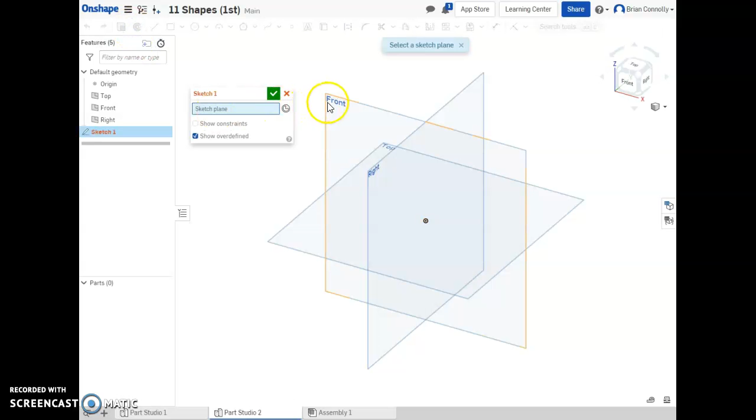So I create my first sketch, and I'm going to sketch on my front plane. Again, I'm moving and rotating just so that I can make sure to look at this sketch straight on, and I'm always clicking on that origin to start my sketch. Then from there, I'm switching to my dimension tool. It was 2 inches wide, and taking a look, it's 1.25 tall. So now I've got my rectangle. It is fully constrained, not only in size but also location.

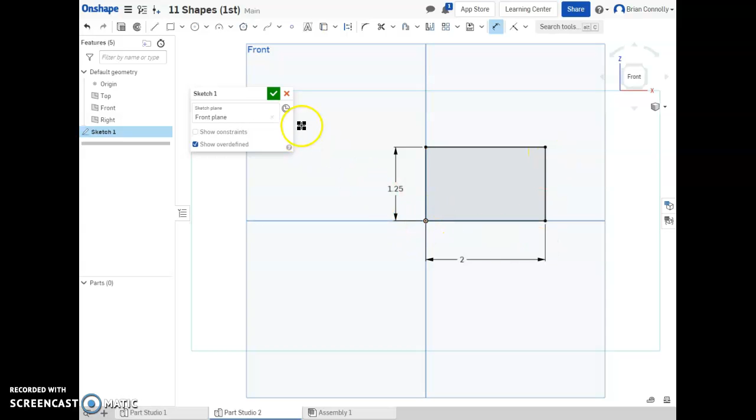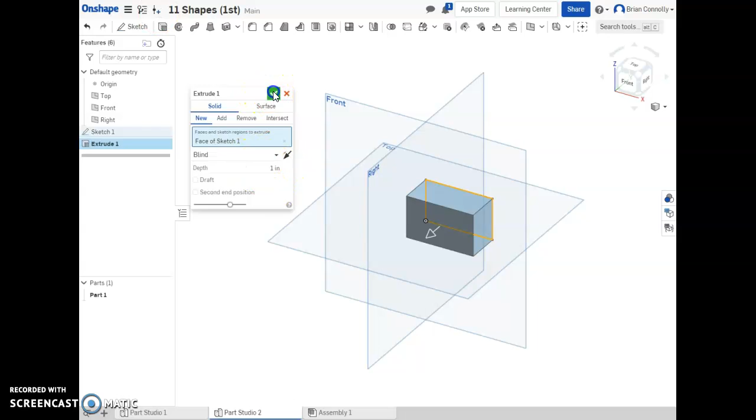I can then finish that sketch and extrude. I want to extrude a solid. I'm going to create a new part because this is my first extrusion. The face that I want to extrude is this one. It is going a certain distance and ending, so I'm selecting blind in this option here. The direction doesn't matter in my case, it could go this way or this way, it's going to end up with the same solid either way. And then the depth, according to my drawing, is 1 inch, so I'm going to keep my depth at 1 inch. There we go, we have the overall solid part of this.

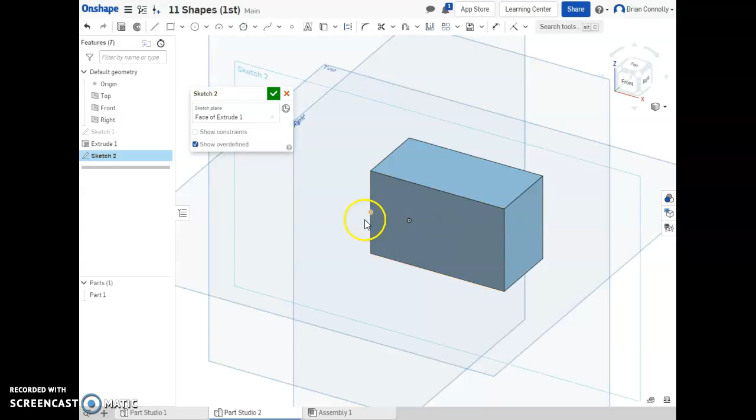And then what we're going to do is sketch what that loft looks like in 2 different places, not only on the front but also the back. So I'm going to create a new sketch, and I'm going to select this front face right here. Again, I'm switching to look at it straight on, and it looked like a triangle. You'll notice that I'm actually drawing this triangle so that it's not anywhere near correct. And so the drawing, I can see that it goes near the bottom, it's 1 square away, so 0.25 up from the bottom, and it's halfway in from either side.

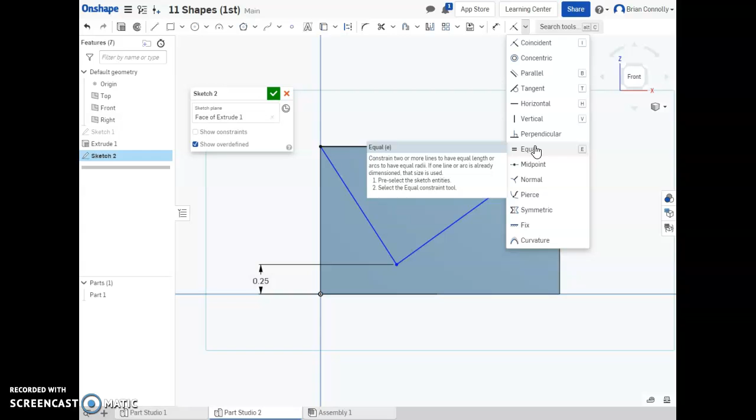The reason I did that is I wanted to make sure that I'm manually putting in the constraints. So I'm going to put in my dimension here. From the bottom of this to the bottom of the existing part was 0.25. Then I have a couple different options. I could dimension and put in 1 inch right here, and that would fully dimension it. The other option is I could actually make these 2 lines equal. This is something that's symmetrical so that these lines will actually be equal on this triangle. So if I click on both of these, it makes them the same length, and that actually fully constrains this part.

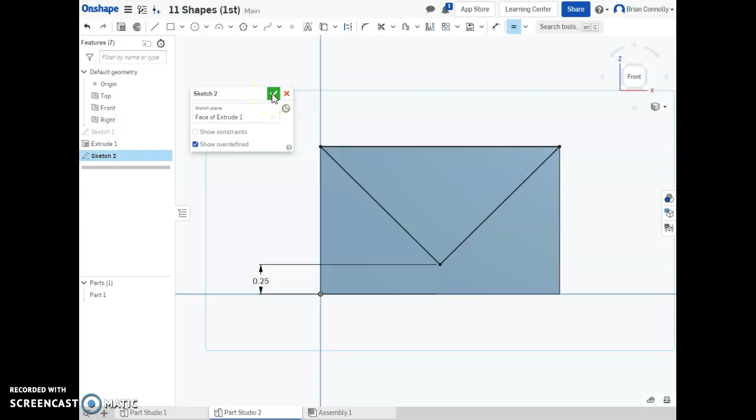Now I have this fully constrained. I've made the triangle, it is the correct size and shape. I'm going to finish my sketch. And unlike what we've done in the past, where we've then extruded right away, we're actually going to switch, and we're going to draw another sketch.

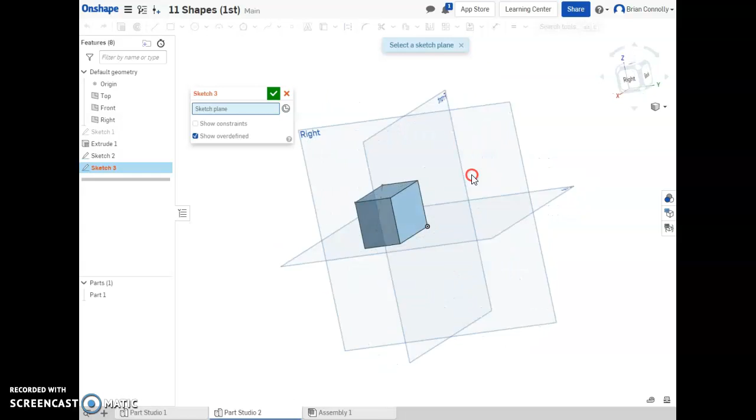And this time it's going to be on this back face. You can see I'm using the view cube to kind of quickly move things around. You can also right-click and drag to find that back face. But I'm going to select this back face right here for my sketch,

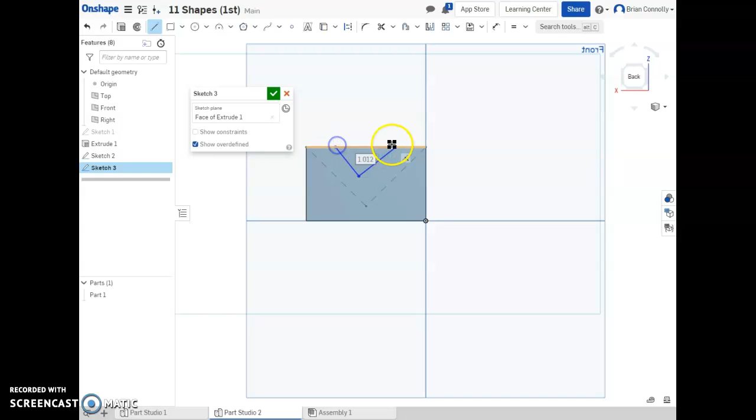and then I'm going to look at it straight on. The next thing I'm going to do is I'm going to draw what this looks like from the back. And again, it's a triangle. And so I'm going to actually just draw that triangle right there. And then I'm going to dimension it, and I can see it's a 1/2 inch from this side, a 1/2 inch from this side. It is, if I'm counting over, another 1/2 inch in, and then it's a 1/2 inch down.

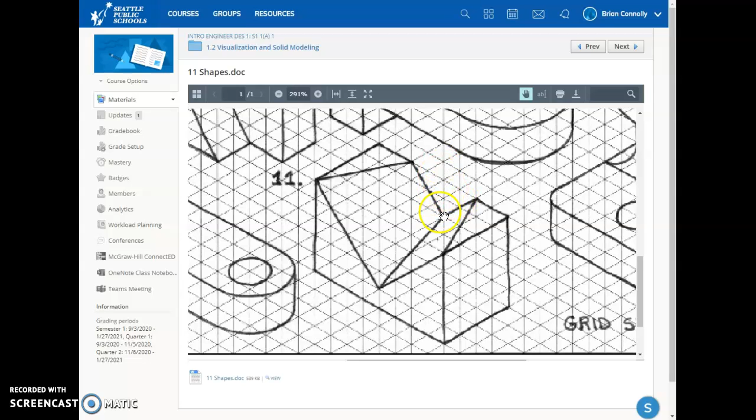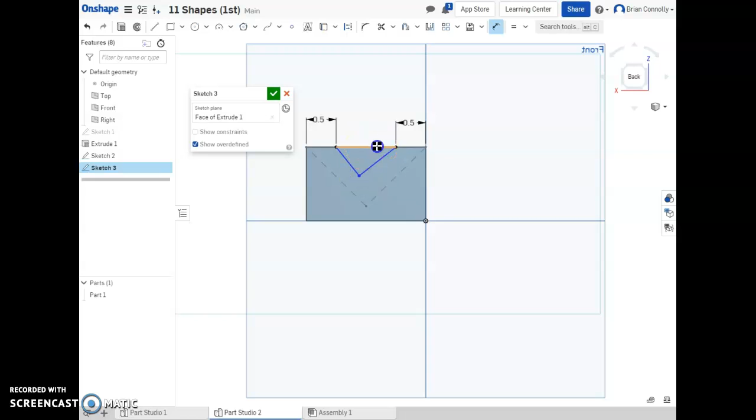So the triangle, if I'm looking at this line, it's a 1/2 inch along my left and right axis, but it's also 1/2 inch down from the top. So I can put my dimensions in. I'm going to click on my dimension tool. So this point and this point, that's 1/2 inch or 0.5. I'm going to select these 2 points right here and go 0.5 as well. And then I'm going to select from here to the top and make that 0.5.

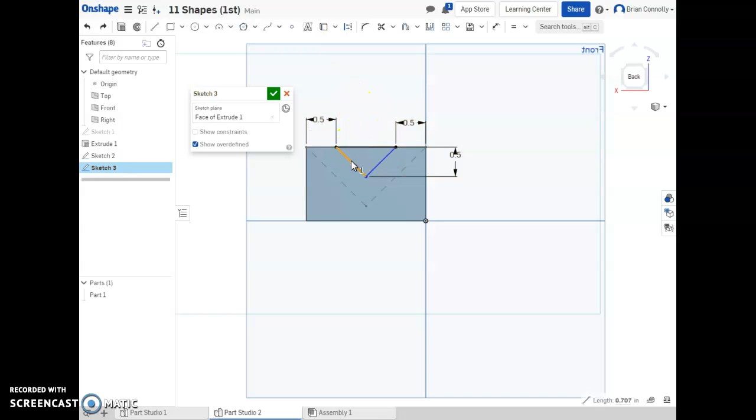And you'll notice it's not quite fully constrained. Again, I still have that same option of it is in the center, so I could dimension and measure, or I can use my geometric constraints and have the computer do it. Oh, something happened here. Okay. So here's something that happened when I was first drawing, and I'm going to show my constraints to show you this. And this happens semi-frequently, but you'll see that there's actually a perpendicular constraint right here.

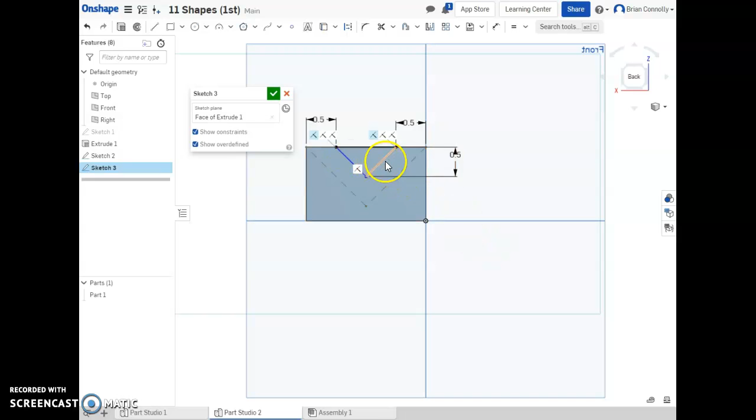And these lines actually are not perpendicular. For the final part, they should not be perpendicular. So what I can actually do is click on that, make it yellow to highlight it and select it, and then I'm just hitting the delete key on my keyboard. That takes away that constraint right there, which then allows me to add in my equals constraint. Those 2 lines could not be perpendicular and also equal length, so I had to remove one of those constraints, the one I didn't want, to then add in the correct one.

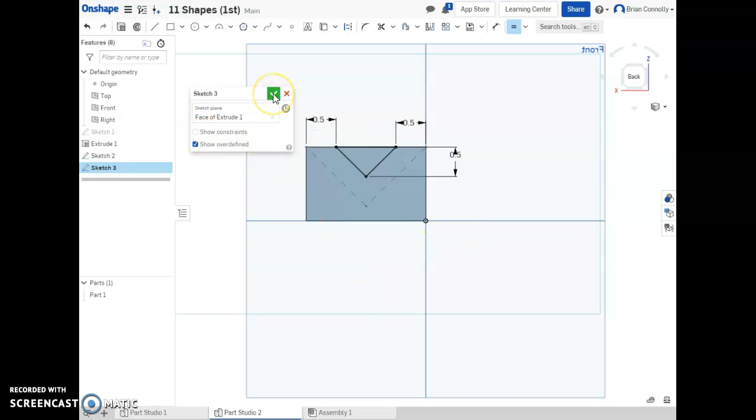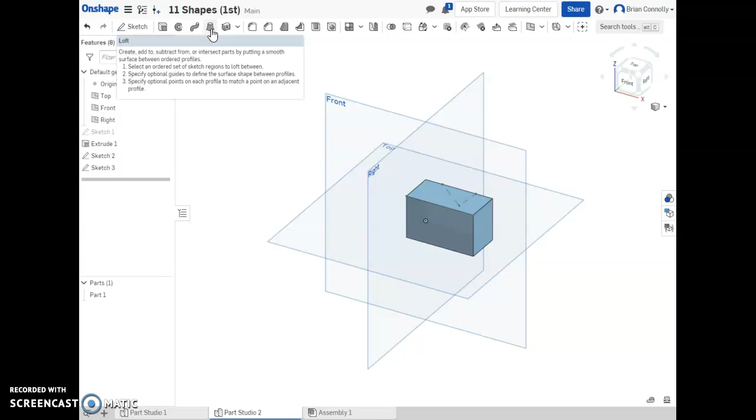So I'm finishing my sketch. I've got the 2 different sketches on both sides, and what I can do now is actually use this Loft feature, and you can see it kind of looks like a circle on the top and a square on the bottom, and that's what it does. It takes a shape and kind of melds it until it gets to that other shape.

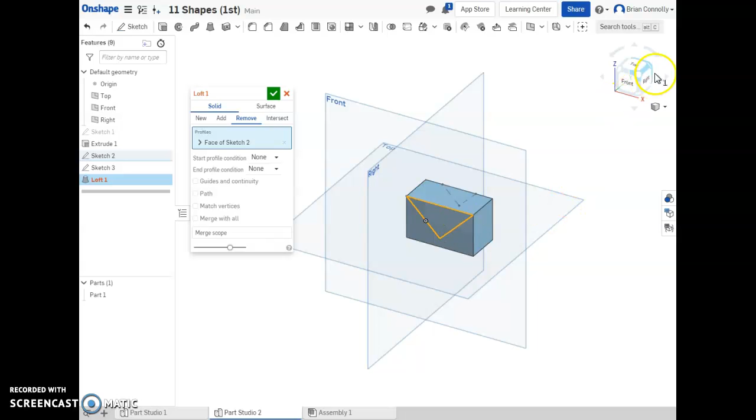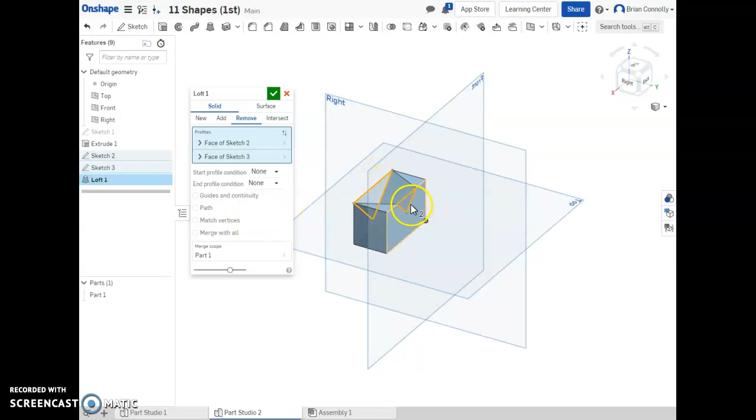I'm going to select my solid, and then I actually want to remove, so I'm going to make sure that I remove. It's asking for profiles, so I can go over here and select this triangle right here. I can also go over here and select this triangle as well. If I wanted to, I could actually select the sketches over here in this toolbar, but I don't need to. Everything else we're not going to worry about right now. This actually is all we need to know for this tool at this moment.

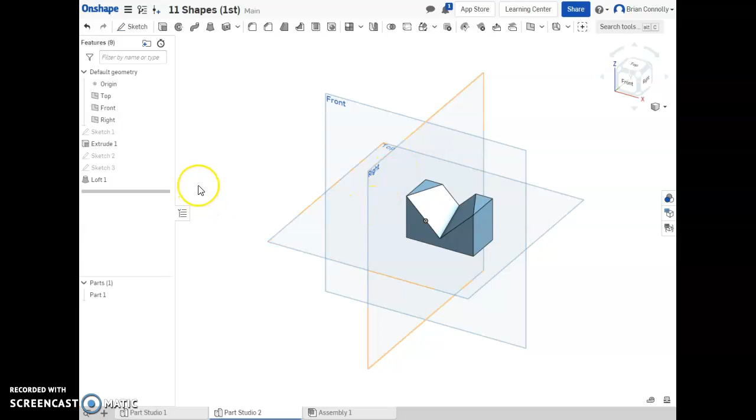So I'm going to hit OK. And now I can see that that shape is looking correct. The biggest mistake I tend to see with this part is people will not choose to remove, and so they end up with adding material where there already is material, which doesn't actually change anything. So there you go. That is the Loft tool, and that is part number 11 for the 11 shapes.